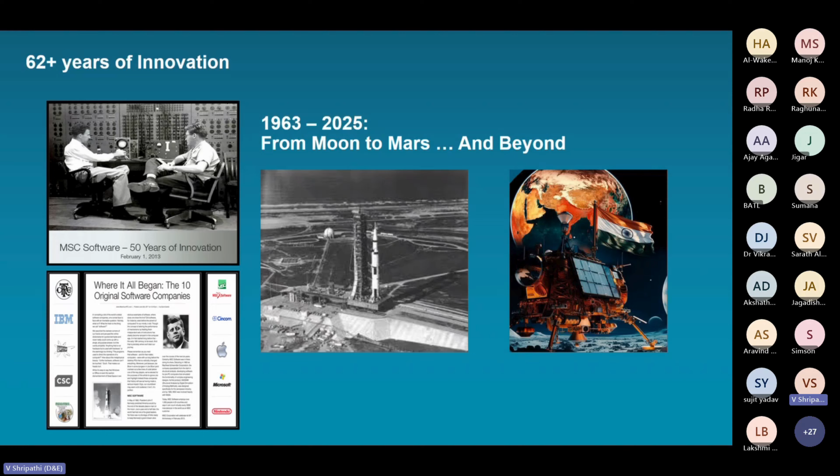We also are among the 10 original software companies in the world, alongside IBM, CSC, Microsoft, the only simulation company who stands there. And we are proud to be part of almost all the aerospace programs in the world, be it US based or India based. We are pretty much connected. And of course, there is no end to innovation, and we will always continue to do so.

Our work with India, I will be specific to India because we are all here for learning and sharing the knowledge of what we can really do better for our country, and what we can do from our country for others. We work on almost all the projects across the DRDOs and other labs, which includes the LCA program or AMCA or SARAS, or even all the DRDO's weapon programs; we are integrally part of that.

So, out of all the solutions we have, we were famously known as the MSC Nastran company because nobody knew anything else of what MSC does. And I would like to highlight that in 2015, we acquired a company by the name Simufact. Simufact stands for simulation of manufacturing, and it included welding, forming, forging, and also additive manufacturing during that particular period of time.

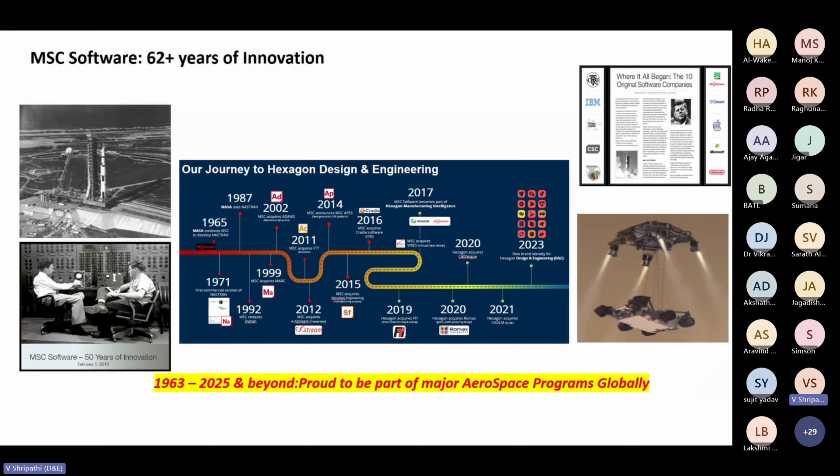It focused on metal additive, and I will also talk about the other additive solutions we house, but Simufact really works on the metal additive platform. So from the solution set we have, our idea is to make sure that there are end-to-end simulation capabilities which can help the customer reduce the investment on physical tests. We will take some case studies and also discuss anything which comes up in this forum.

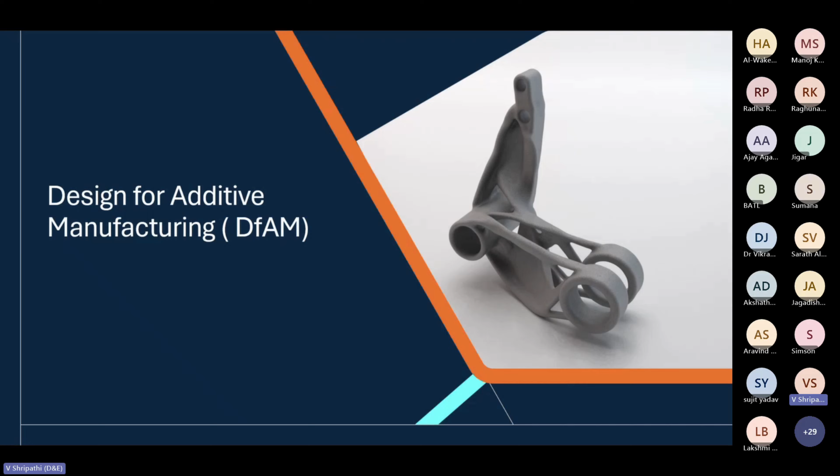So I would like to start with DFAM. All of us are aware that design for additive manufacturing is something of interest for all the AM engineers, or enthusiasts. But there are challenges. For example, can I really do everything in one go? Optimizing the structure, smoothing the structure, and actually outputting a CAD file. Can I do that? I'll go through that.

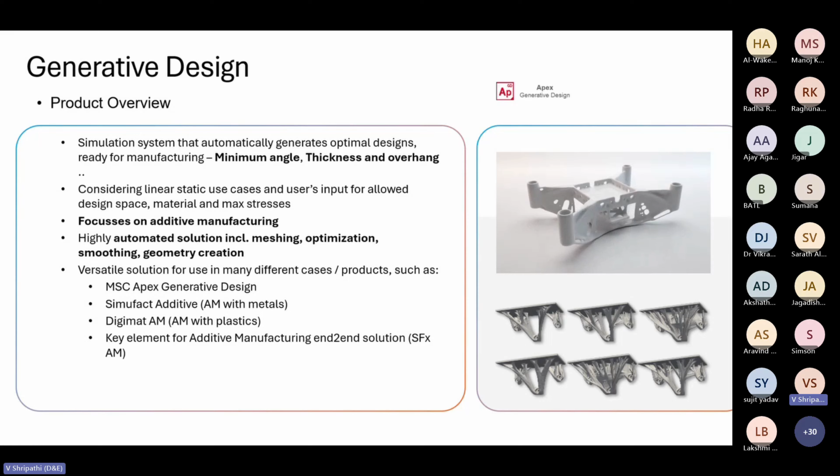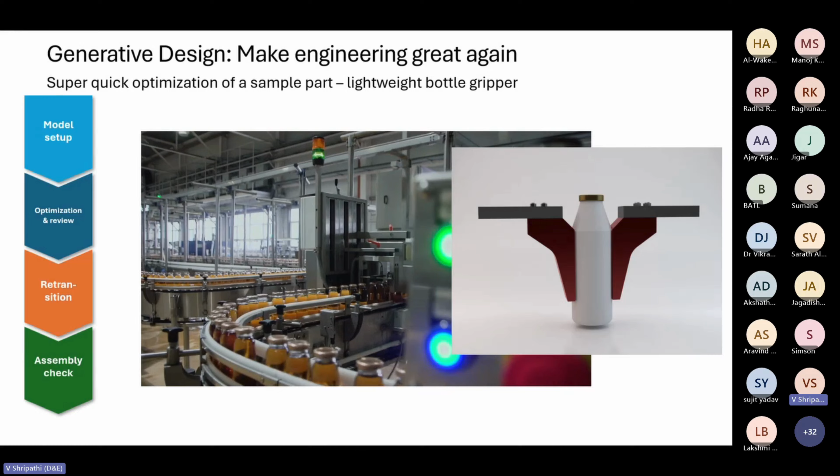I would like to take some examples and explain. This is one customer's case where lightweighting of a bottle gripper was to be done. What you see here is a gripper, and this lightweighting is not really optimum with subtractive manufacturing. Here we took about 3 minutes for pre-processing. If you have a laptop with a GPU, you can solve it in 60 minutes. That means the entire optimization cycle takes 60 minutes on the laptop.

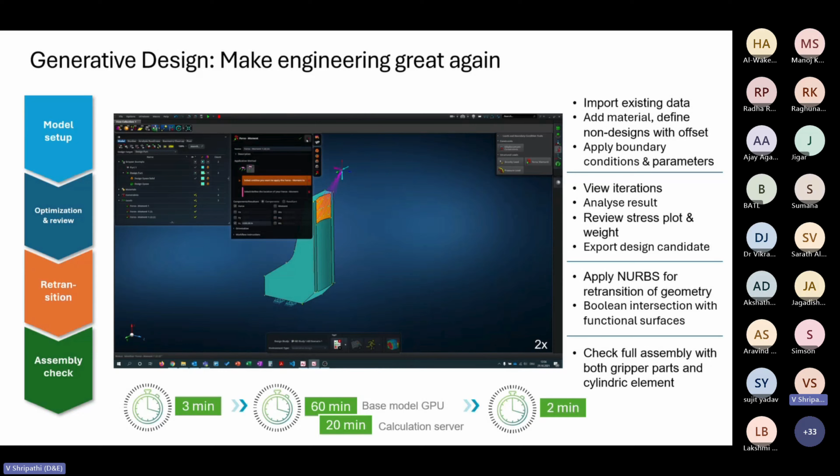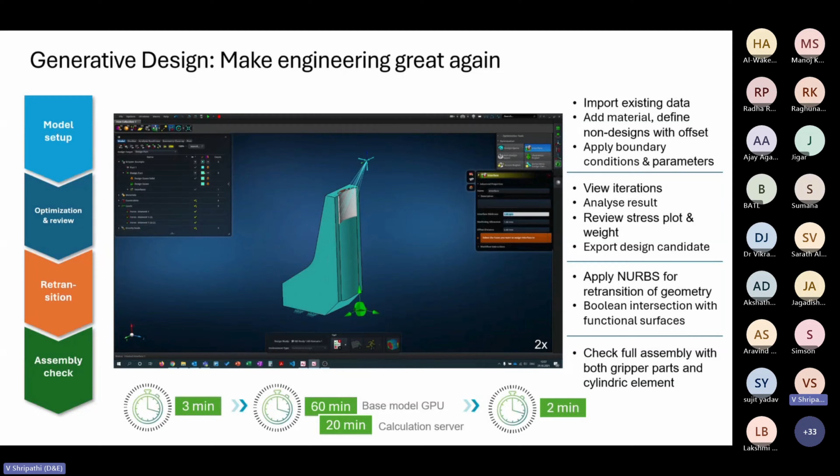If you don't have a laptop to solve on and would like to use a server with 64 or 128 cores for parallel processing, that takes about 20 minutes, and 2 minutes for post-processing to export the geometry file. This is clocked on real software usage time, and what we are doing here is specifying the design areas and non-design areas and creating the case for optimization.

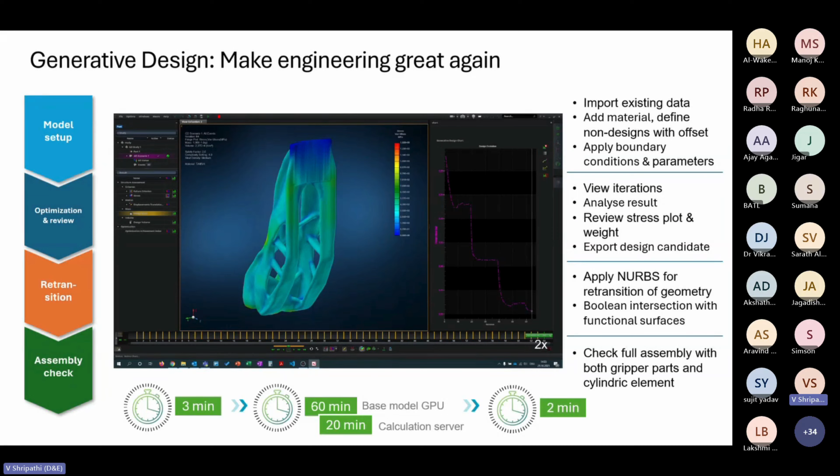And you can see that it gave an optimized geometry which is compliant for additive manufacturing. And it also gives, with the loads you apply, the stress values and the displacements. And thus you can actually control the structural strength for whatever requirement you have.

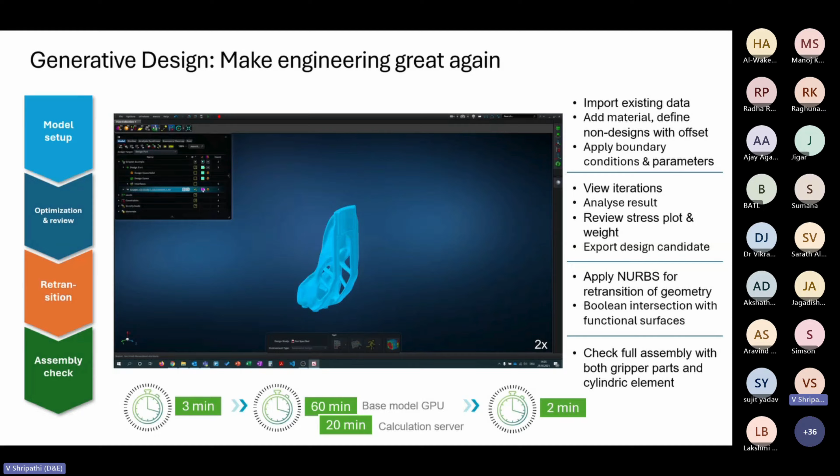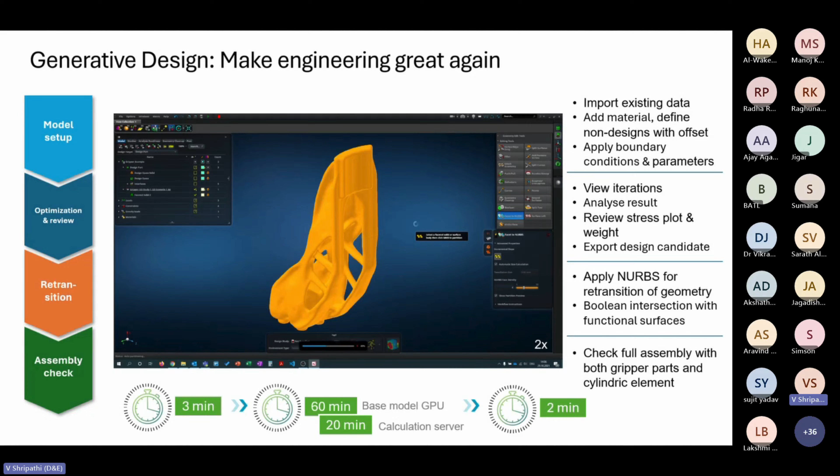So when we say this, the GUI is built to ensure that you are not really having a GUI which is different from a CAD environment. So it's easy to use. So this is something which I wanted to show. What you saw on the first slide was before optimization, and this is after optimization and the print.

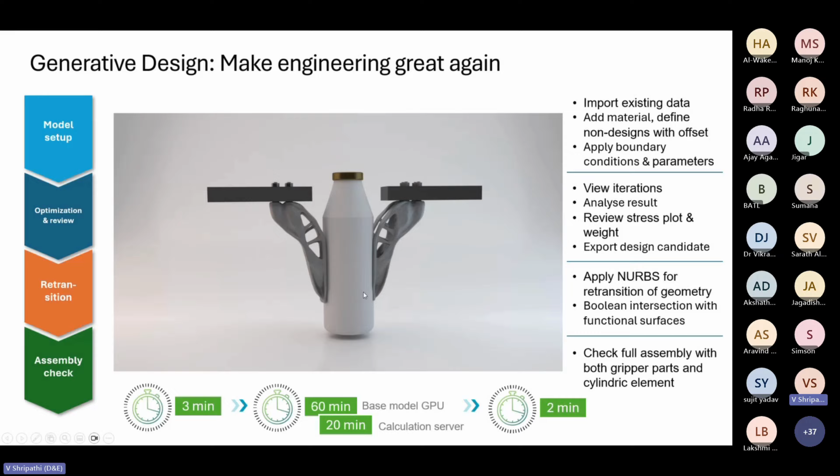So this is another one of my favorites because one of my colleagues worked on this, about 7, 8 years ago, and this is a satellite bracket. This satellite bracket had a target weight reduction of 40%. The target by the organization was to hit 40% reduction, but we could actually hit about 55% with 31% stress reduction and 79% stiffness increase.

You know that stress and stiffness are inversely related, and that is something which is shown here. And we are able to find, for example, 6 or 7 designs which are feasible, and you can look at one of the final designs which can be selected. And the assembly is also done for the satellite. It's a TESAT product.

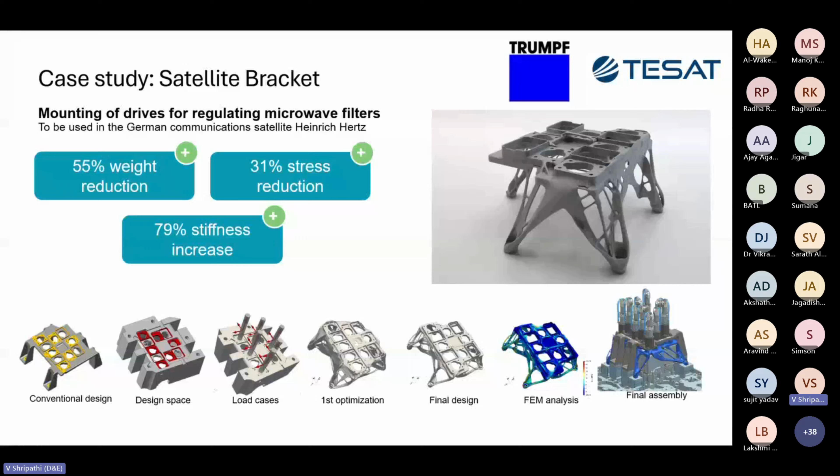So then going into what is called end-to-end simulation, what we really spoke about. First is to do a DFAM. DFAM allows you to import a geometry, specify material properties, specify loads, and then say these are my constraints, your stress, your displacements, and then come out with the geometry.

Now, once you are out with the geometry, you can do the feasibility study of the print. How many parts can I print? And what is the best orientation to print? All of these things within Simufact Additive for metal components. And for additive manufacturing of polymers, you can do it with Digimat AM, transferring the same data. So metal 3D as well as polymer are both supported.

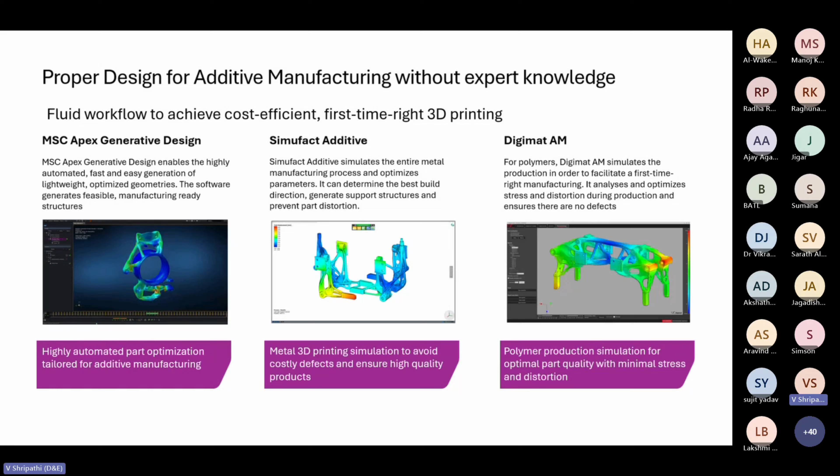However, today's discussion would be more on metal and less on polymer. And if you feel it was useful, we can have another session on polymer.

So now coming to the simulation of additive manufacturing. Why do we have to simulate, first of all? If you are a company or an individual who owns the machine, it could be an EOS or an SLM or a Renishaw, whatever the machine, you would have seen that there is either a recoater jam or shrink line issues. There could be a distortion. When I say this, your intended shape has not been achieved. All of these things are a day-to-day problem.

And to address this, you need not do trial and error. You can simulate. Now, how do you simulate? There are ways to do that. Firstly, I would like to mention that all that I speak may not be in the slide. Since the recording is available, maybe that will be useful.

So, there are three levels of simulation which we can do. One is macro, where you don't consider the thermal effects. And when I say thermal effects, no consideration of your layer-to-layer thermal effects in any way. It's purely an approach based on the angle of the print and the settings of the machine.

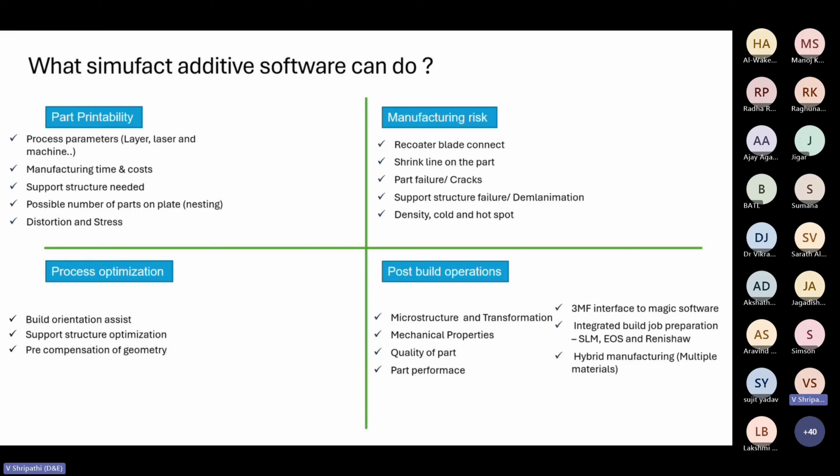And I am sure Akshata would know it. We printed this long ago in Wipro 3D.

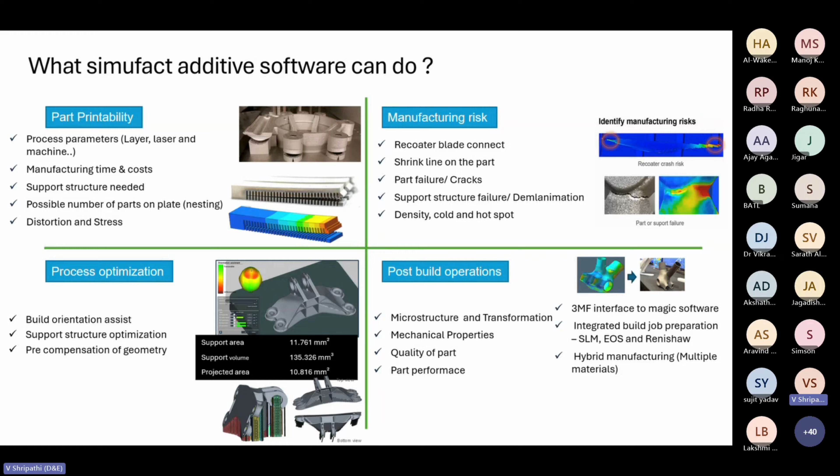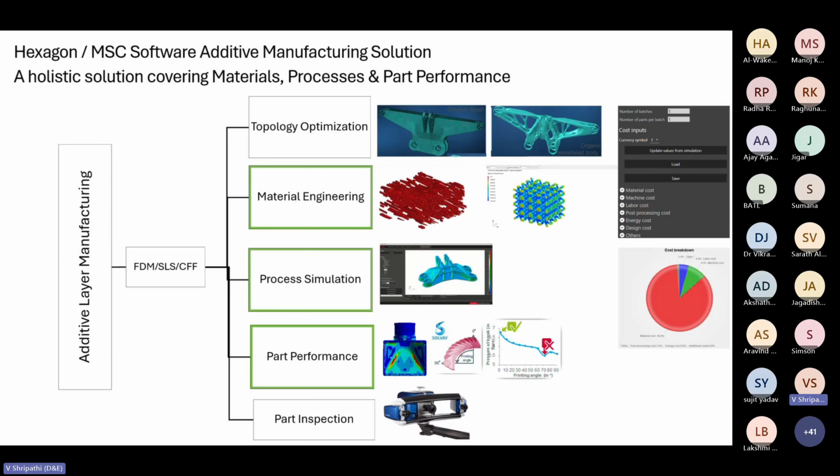So now, when you look at MSC Software's way of polymer printing, we have FDM, SLS, CFF, all of these solutions. I will not go into the details of polymer, but pretty much the same features do apply for polymer. When I say this, polymer goes a little deeper into materials where metal does not.

Just to take an LPBF case, almost 80% of the failures one can actually simulate, and 20% is inevitable because of certain cases which are not really part of the simulation. So be it recoater crash or shrink line issue or overheating, that is overheating by conduction, convection, and also radiation, we can look at it. And conduction, convection play a major role. For example, support failure or cracking is a very entry-level analysis which can be done. And the standard material databases do exist, be it Ti-64 or Inconel or steel; these particular material properties already exist.

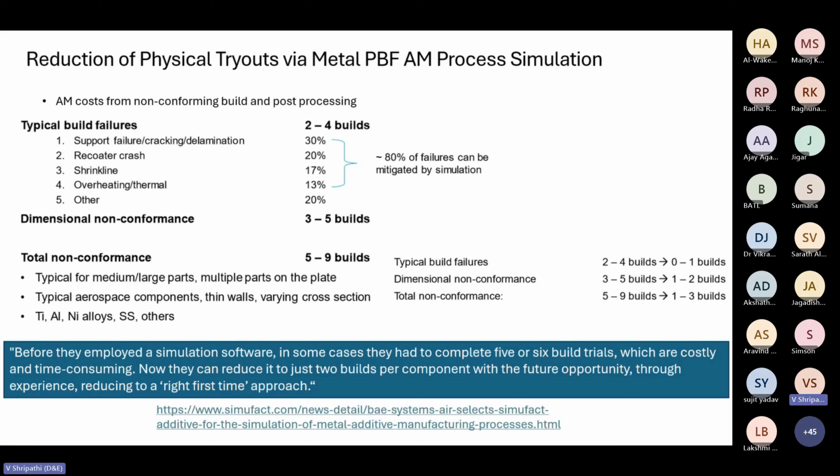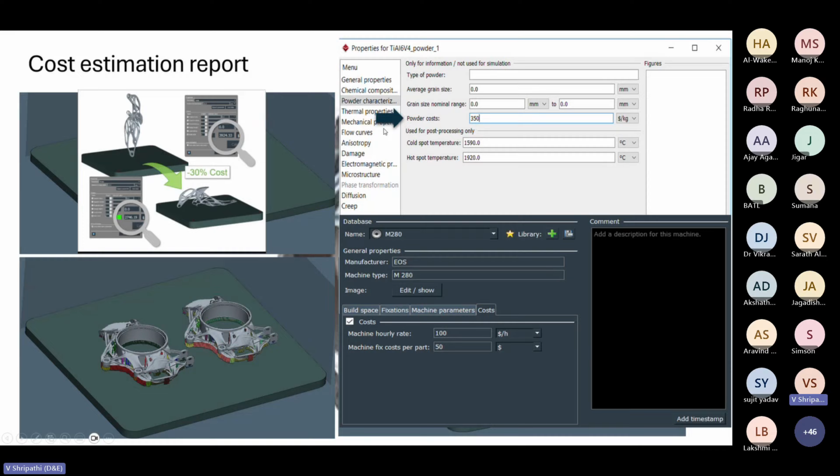Now let us go into the cost estimation for R&D engineers. Simulation itself is an R&D for us, but for the production houses, the cost makes a major impact. So how do you really look at cost estimation? I'll just get into some of the examples. For example, the one you see on the left-hand side is the light hinge, and there is light hinge plus, and I'll talk about it. So there are different subcategories which actually contribute to the cost, which I will actually talk about.

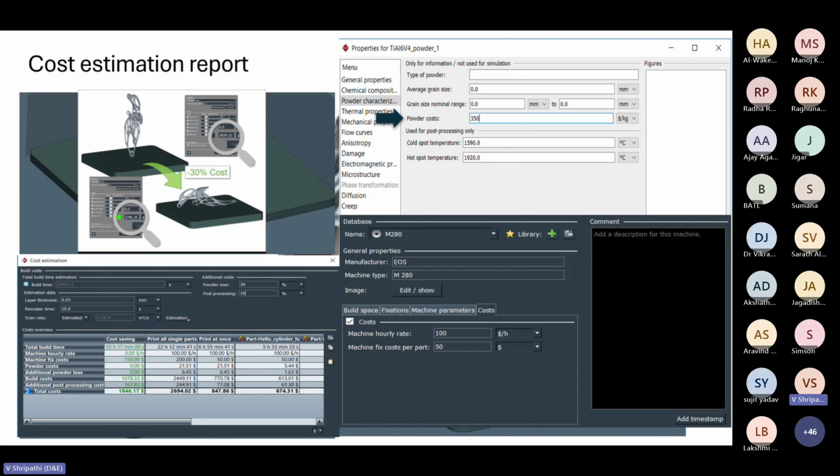So for example, what is the machine hour rate, what is the material cost, and then the build costs, basically including the material costs. These are all calculated based on the inputs you provide. For example, you provide the powder cost, as well as data like your machine running cost per hour, which is the power consumption and all these things, and you can come out with an estimation report.

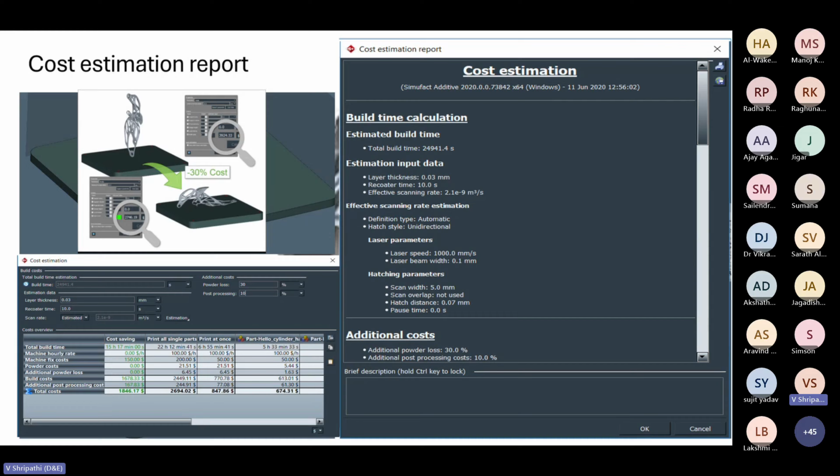So this is one of the cases for aerospace brackets. It's a butterfly bracket, everybody would know it. It is aluminum alloy, and the unit price for this, without simulation or cost optimization, was quoted by one of the organizations at about 85,000 plus. And what is being done is basically optimizing the support structure as well as optimizing the operation time.

When I say this, you can look at really optimizing the print time as well, based on the proper orientation for the structure. And what you see on the right-hand side is a cost for a single build, and then you can also do nesting if you have a machine which can build multiple parts, and that simulation is also possible.

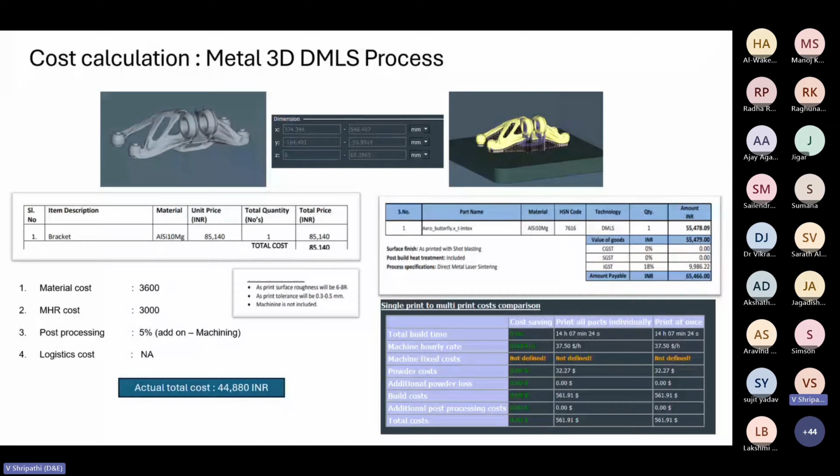And with the optimized cost, you can see that it comes down to 65,466. With further optimization, it's about 44,800. Of course, 44,800 is more squeezed. Maybe what would be realistic is to consider about 66,000. So what we are talking about is a good 20% plus saving for a simulation-based approach.

Now let us get into a little more advanced part of it. Raytheon Technologies has one of the divisions which works on additive manufacturing, which maybe most of you know. When these particular cases come to us, it is a joint approach, and we do R&D required at our end as well, and then we develop some of the solutions if they are missing.

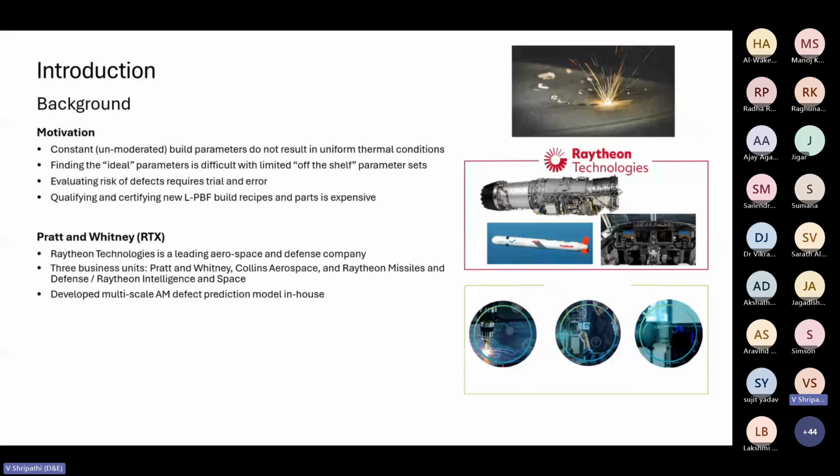So in this case, the failure modes, or we call it simulation requirements, were different. Something like the effects of keyhole formation, balling, surface roughness, lack of fusion, all of these things are something which is of concern.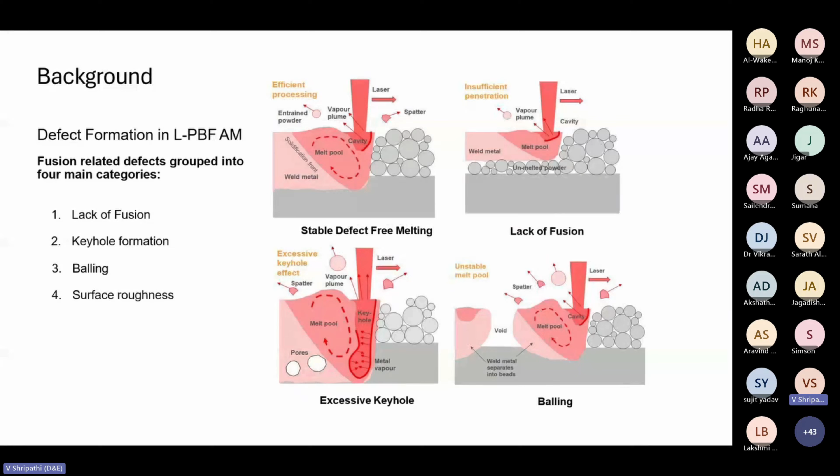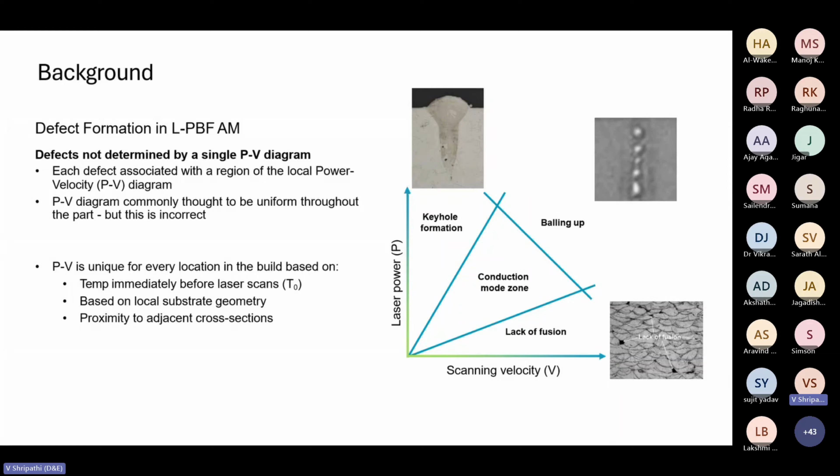And you can see here that the data of each material, the PV diagram, or the data coming from this particular PV diagram, is already part of Simufact. We actually had other solutions also - we had our own scanner when we were part of Hexagon, but that is not anymore a solution, because we are part of Cadence now. But any other scanner you have, you can still take the data and then process it.

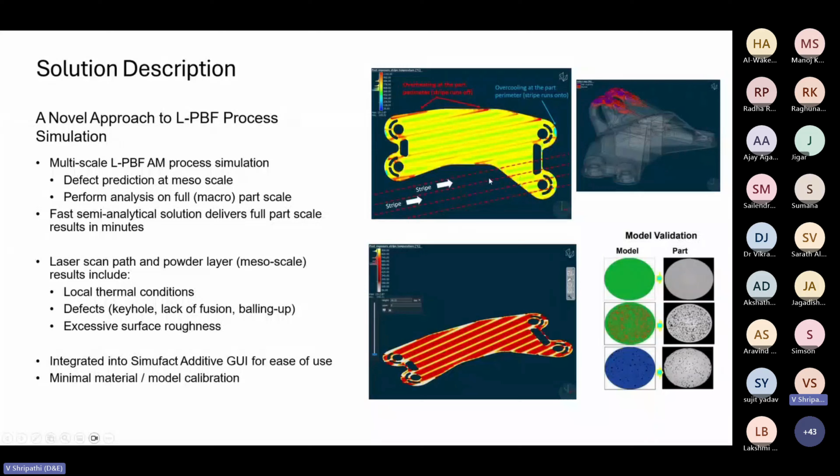So this PV diagram based data provides the predictions for mesoscale. You can see the plots - these are the color plots where if you are having green, it is a stable keyhole, unstable keyhole is saffron in color, and then you have fully green, which is defect free, and unmelt is again orangish. So you actually have this particular color plot on your structure.

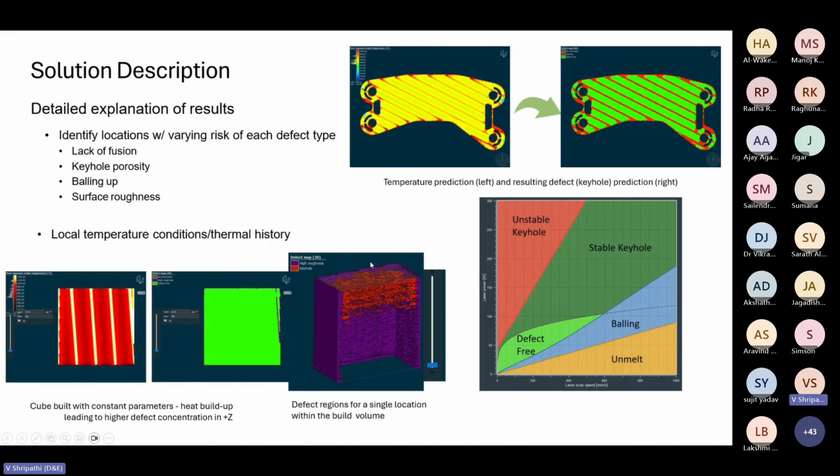This is again, as I said, purely a simulation approach, and you can look at optimizing it further based on optimization techniques, which I'll talk about in the future.

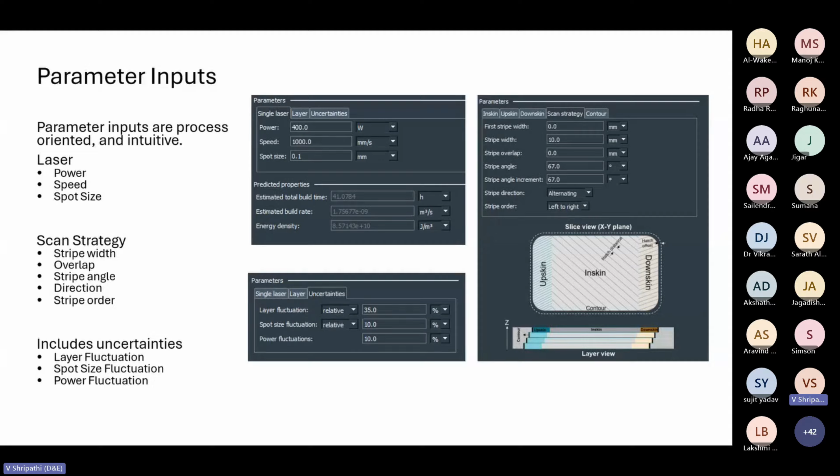So parameter inputs are pretty much simple. You can see here that the power, speed, spot size, these are the common parameters which we have to have. The standard machine properties already exist, and you can look at setting whatever values you are giving to the machine - the same settings are to be in the simulation for you to achieve whatever you want. This can be worked back - optimized parameters can also be something which we can look at in the optimization.

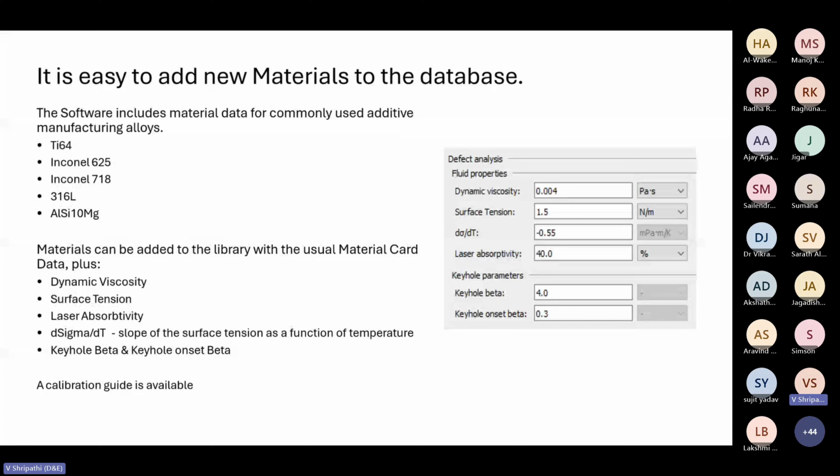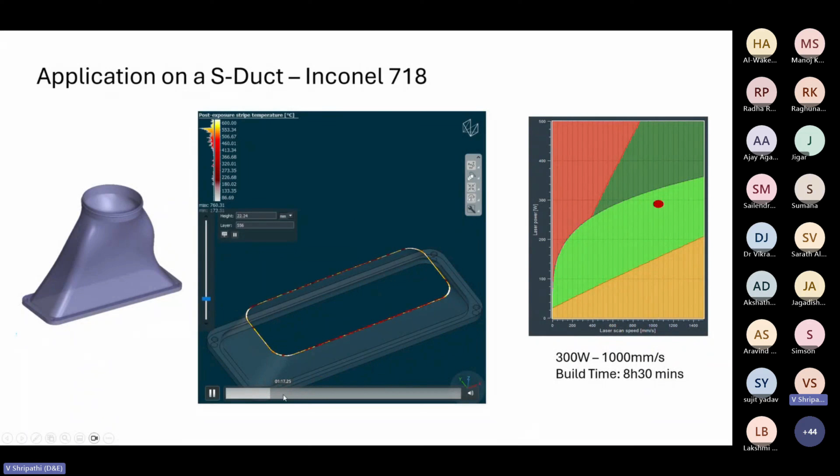So this is Inconel 718, and then you can see that the build happens. This is meso - that means every layer you will be able to see what is the output. I will just go and show the final output here.

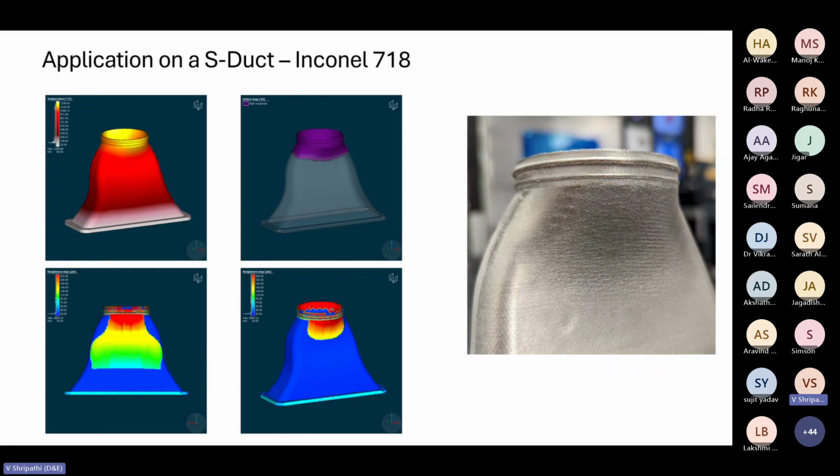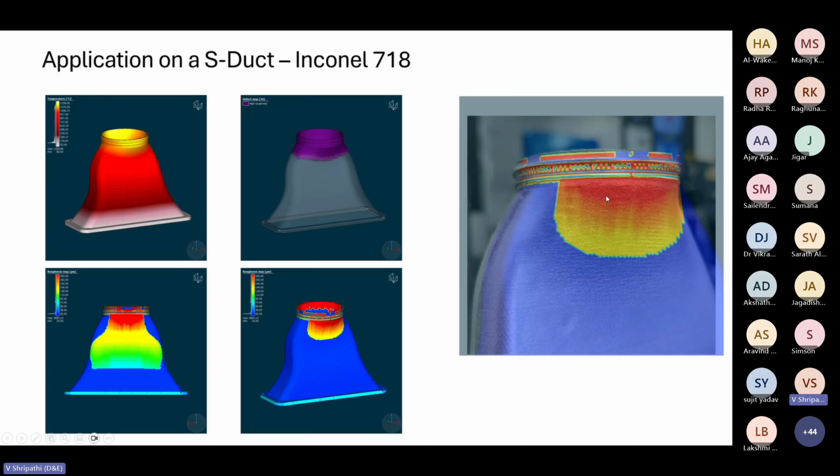So I would like to go into the case studies, and more interest would be on Q&A. This is Light Hinge Plus, and you can also Google it. The weight saving has been more than 70%, and it was originally weighing about 3.3 kgs and knocked down to almost 1 kg and below. And it is one of the very well proven structures for a high strength application, already in use for some cars.

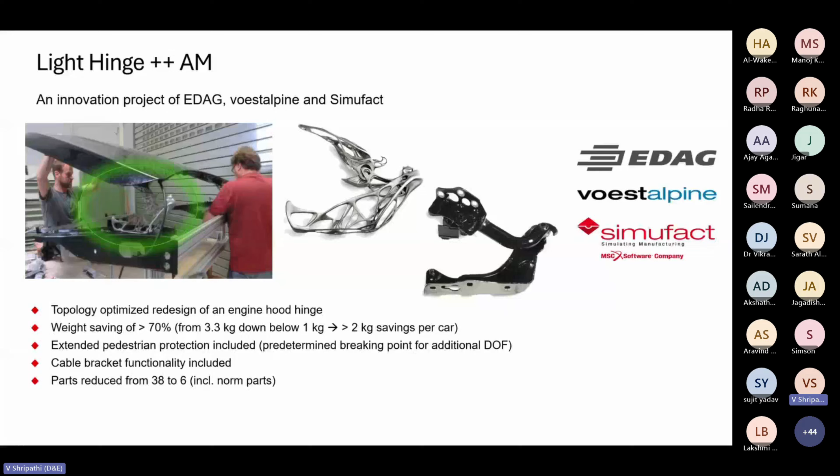And it's ultra lightweight, and then you have some assembly level modelings which are done. You can see here the simulations were done, as well as the actual part testings were done, and you are able to see that on the printed part.

And the same is simulated in our tool like Adams, or Adams plus Nastran, that is for kinematics as well as the structures. So what you really simulate with the strength and the properties can be taken further for your fatigue, depending on SN curve availability. We can do that, as well as your dynamic strength, or ultimate strength kind of an analysis.

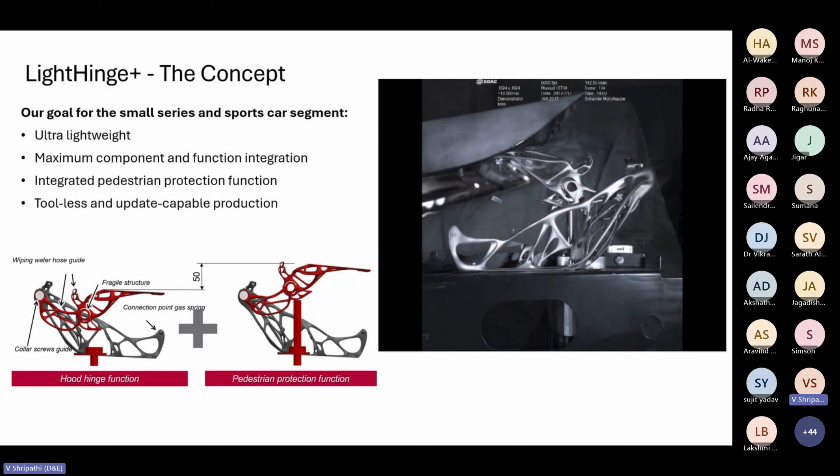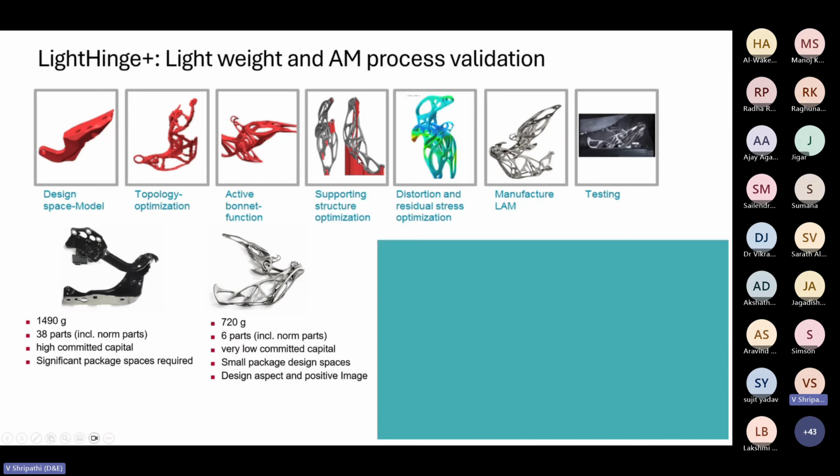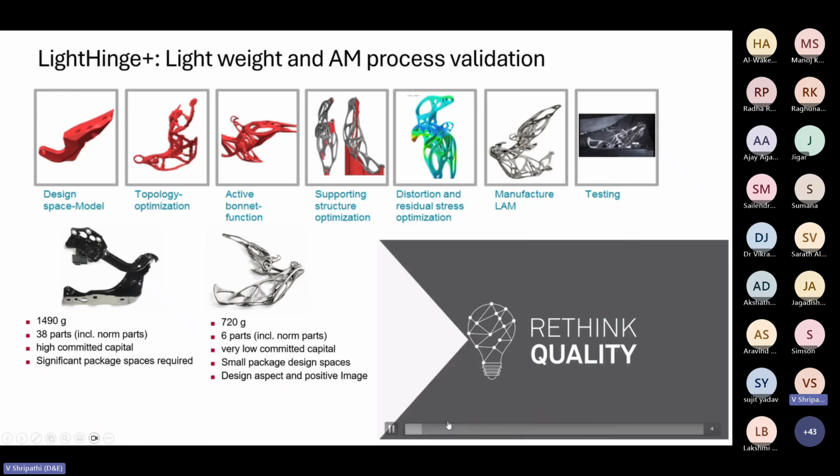So this was the whole process which was followed. Design space model started from a very basic geometry, and then topology optimization was done. Active bonnet function means how it connects to the bonnet and what mechanism is used. Then support structure optimization, and the testing was done, which you saw in the video. You can also see that most of the parts being printed are in bulk, and the optimization is done for parts to be printed in bulk in a particular given machine.

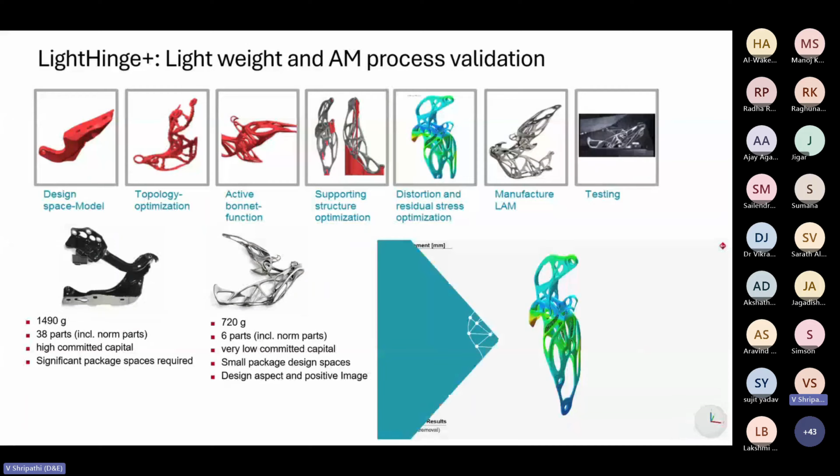So I'll just move forward.

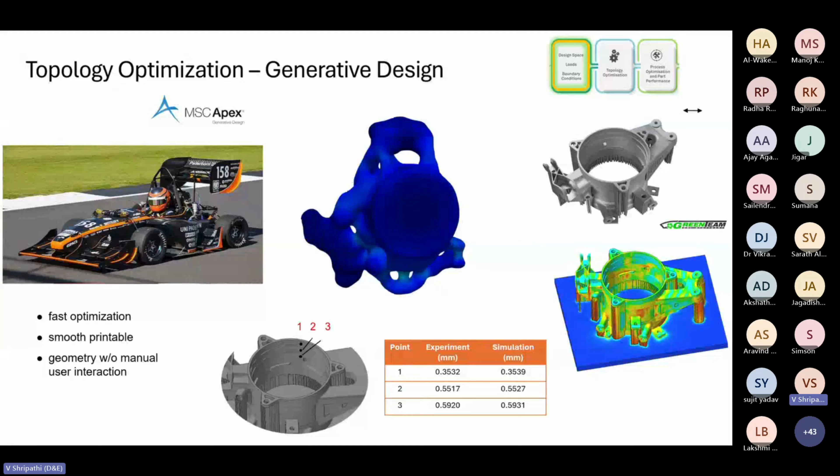This is another case from the green team, and optimization was done for one of the components which undergoes very high speed rotor dynamics load. This again is proven with both optimization and actual experimentation for the loads check, and we are able to reduce the weight in a very optimal manner.

If you look at the designs and the process we have followed, you're already aware of DFAM. The DFAM actually gave a shape for this particular component with 30 to 40% weight saving. We then checked its stability with a tool like Adams, where it does the loads analysis and strength analysis. Once that is done, Simufact is used to see the printability and any printing or manufacturing challenges, and build simulation is done to check for warpage issues.

This is the further simulation which gives its properties with the assembly analysis. Once all the simulations are done, it is actually produced and fit onto the car.

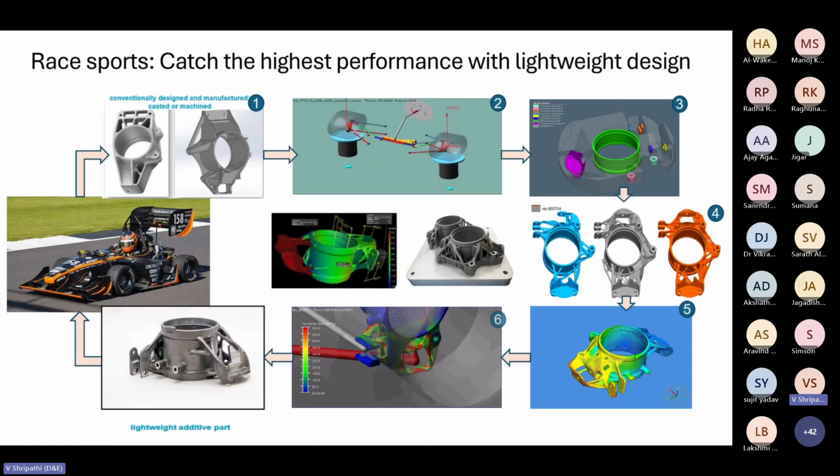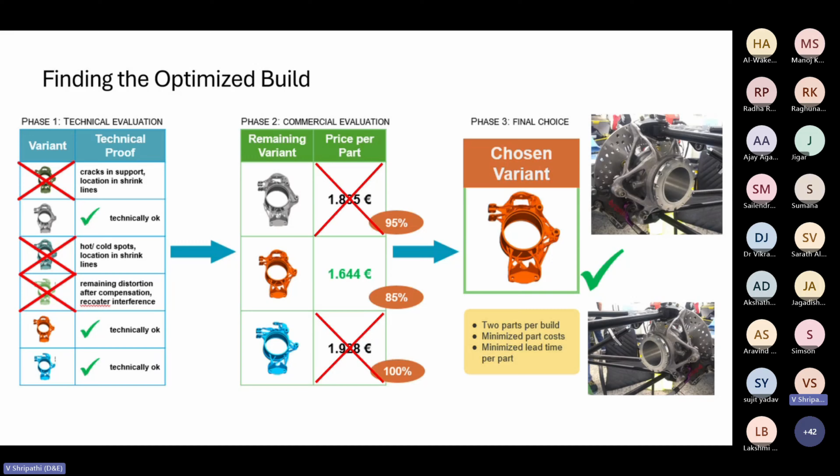And of course everybody knows the green team's participation in the races, with an optimized build. If you look at the parts, one reason the green team has to go for this is that every gram saved in a racing car is worth something like a million dollars. It's not just about the calculation we see here for investing in printing the parts, but every gram for them translates to velocity achieved on the road. That's what we have done, and it's much more priceless than calculating these prices.

So even in the healthcare industry, thanks to one of our colleagues who has done this job earlier - this is a hip joint that had to be designed and printed. A scan was done for the hip joint part. There is a hip joint existing in good condition on one side, and the scan was done for that; the one which has to be replaced was mirrored from it.

Once the scan data comes in, you have a geometry built using Apex generative design, and then you optimize the whole thing in the generative design and simulate for build quality and print sizes.

This is a custom made component, done with generative design where we look at optimizing the part. Digimat is used because this is not a metal component, it's a polymer component, for additive manufacturing. Some part which was metal was tested with Simufact, and Marc was used to test its strength in all conditions - all temperature and loading conditions.

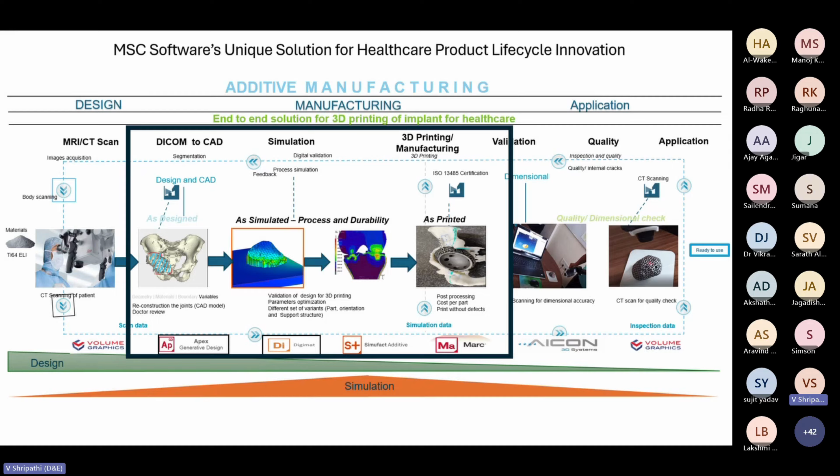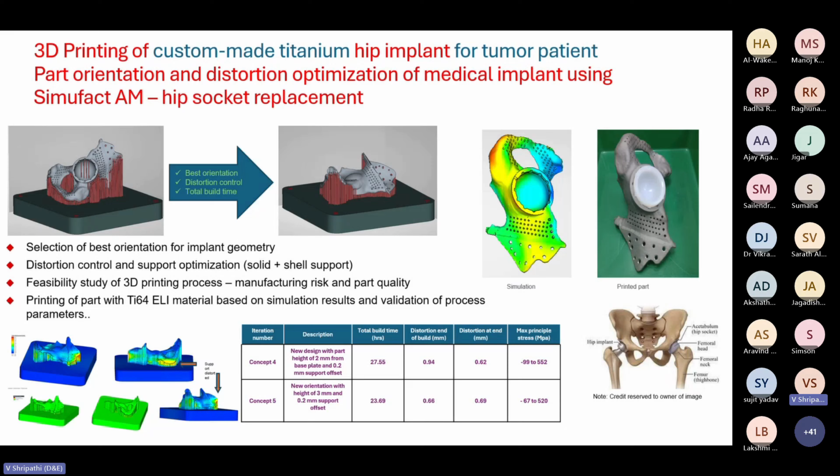So this is the part, and one of the patients who was not from India had the replacement happen at this particular point, with an implant inserted there. You can see that there's no chance for any high level optimization here, but it has to be a perfectly fitting part.

Being part of the digital engineering community, it's very tough to get the certification - this is not fully certified yet, but it's a great job to see how simulation plus manufacturing intelligence, or even the machine, play a role in getting the whole process optimized. So with that, I would thank Sandeep.